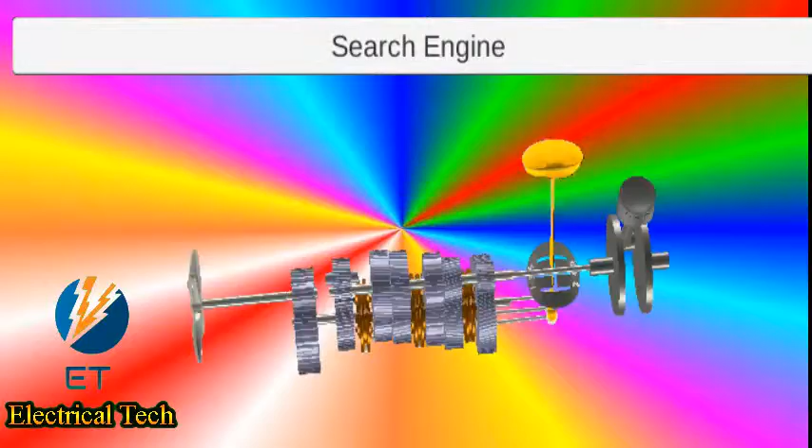In a manual transmission, the flywheel is attached to the engine's crankshaft and spins along with it. The clutch disc sits between the pressure plate and the flywheel and is held against the flywheel under pressure from the pressure plate.

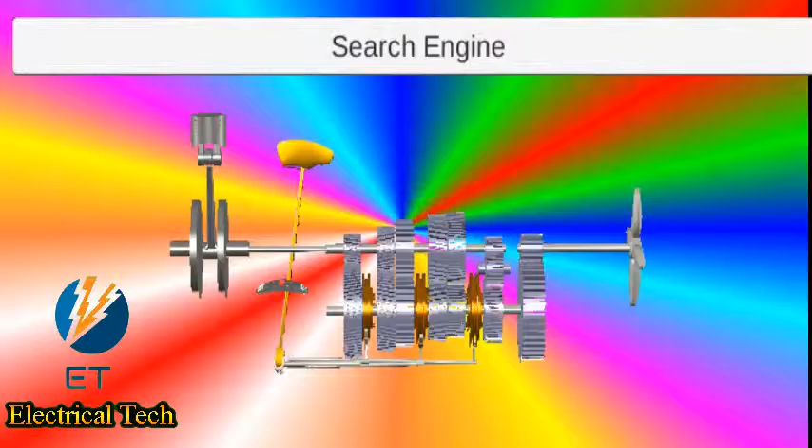When the engine is running and the clutch is engaged, the flywheel spins the clutch plate and hence the transmission. As the clutch pedal is depressed, the throw-out bearing is activated, which causes the pressure plate to stop applying pressure to the clutch disc.

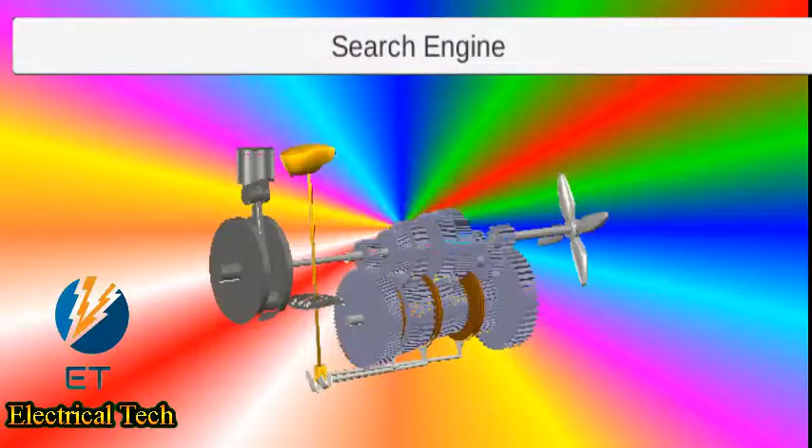This makes the clutch plate stop receiving power from the engine, so that the gear can be shifted without damaging the transmission. When the clutch pedal is released, the throw-out bearing is deactivated, and the clutch disc is again held against the flywheel.

The clutch disc is held against the flywheel, allowing it to start receiving power from the engine again.